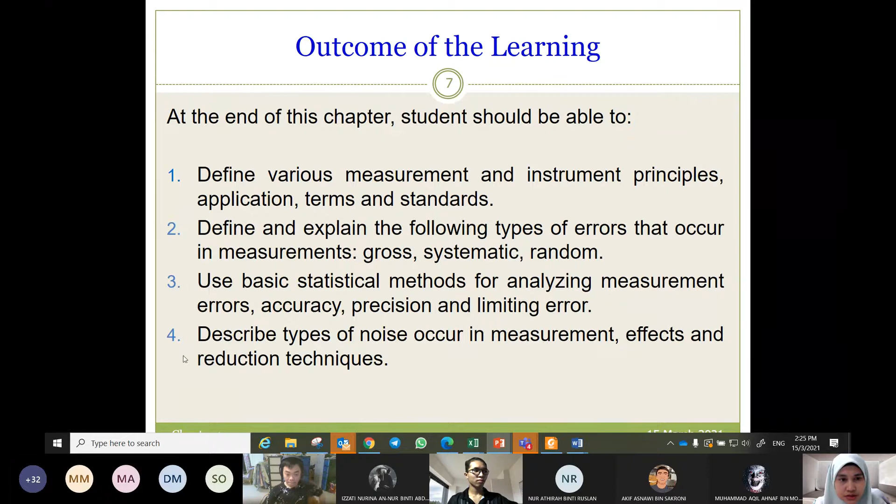explain the following types of errors: gross, systematic and random. Use basic statistical methods for analyzing measurement errors, accuracy, precision, and limiting error. Number 1 and number 2 will be covered today. Number 3 and number 4 will be covered maybe this Friday.

Okay, so basically this subject contains about 50% theory and 50% calculation. It is different from our subject during last semester, principle of electric and electronic, because most of the content of principle of electric and electronic is calculation, right?

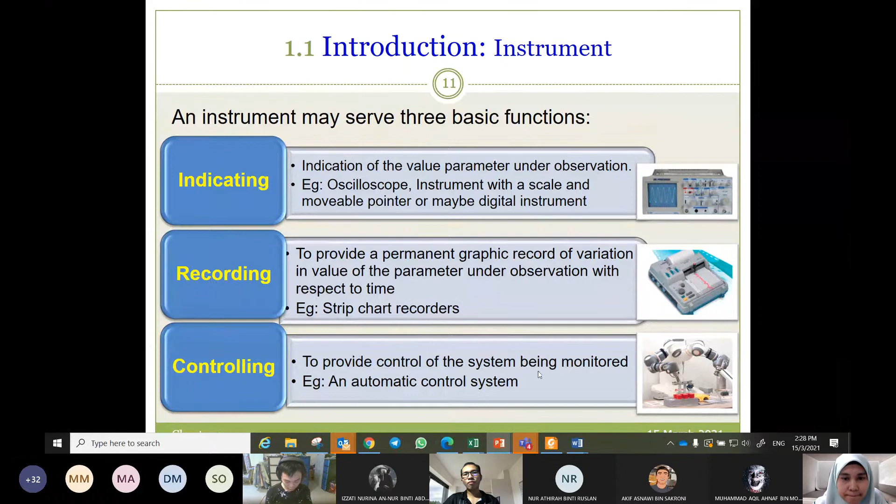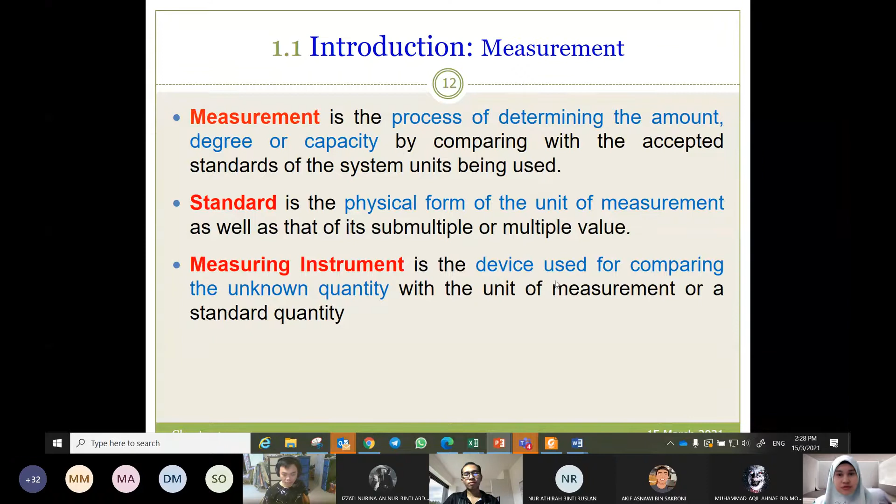Measurement is a process of determining the amount, degree and so on. Standard is the physical form of the unit of measurement. Measuring instrument is the device used for comparing - you can read by yourself. All of this is an introduction to instrumentation and measurement.

the unknown quantity is determined by measuring other functionally related quantities and calculating the desired quantity rather than measuring it directly with an instrument. So it requires a formula. For example, we want to find resistance - a resistance of a conductor may be determined by measuring voltage across the conductor V and current flowing through the conductor I, and calculating by Ohm's law, meaning that we want to find R.

So let's say we want to find resistance across a conductor or a resistor. We measure the voltage through the conductor, and then we measure the current through that conductor - the current flows through the conductor. Then by using Ohm's law, we calculate the resistance. So this is indirect, meaning that we are not directly measuring R, but we find V and I, and then we calculate R by using Ohm's law.

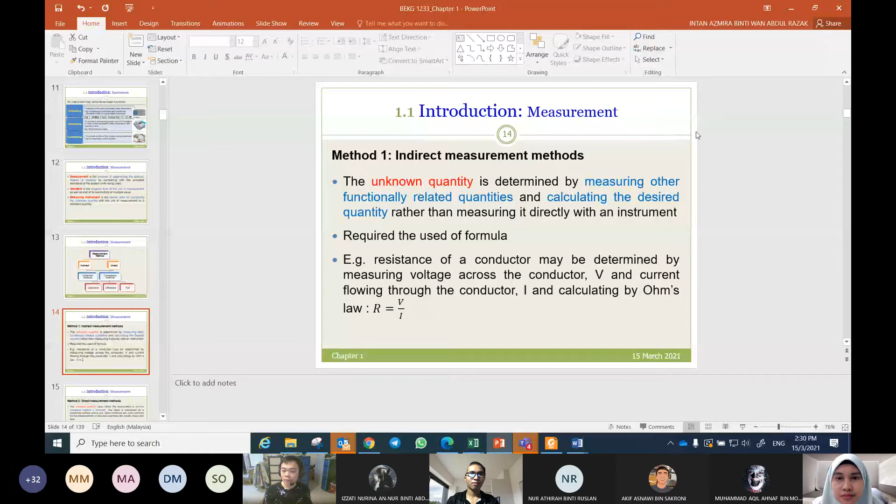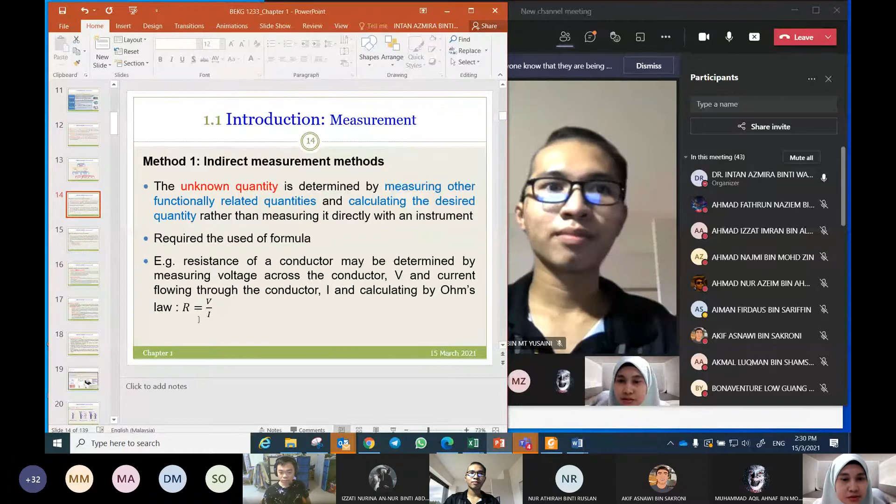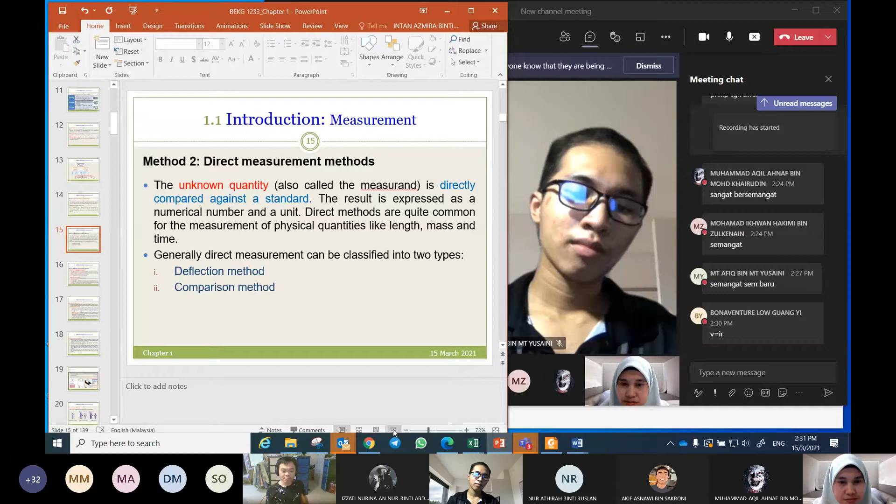So please give me the formula of Ohm's law, the original formula of Ohm's law. V equal to IR. Okay, so R equal to V over I, derived from Ohm's law.

Okay, the next is direct measurement method. The unknown quantity is directly compared against a standard. The result is expressed as a numerical number and a unit.

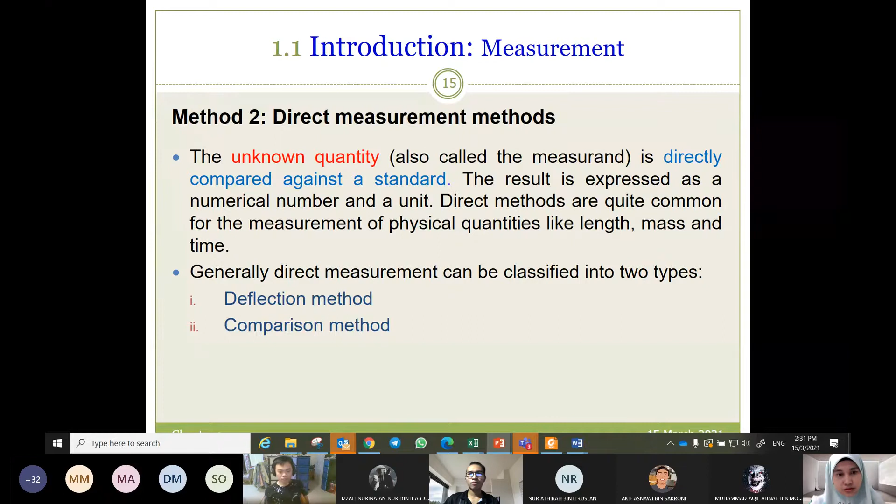So direct measurement can be classified into two: deflection and comparison. Deflection is when the unknown quantity is determined by means of a measuring instrument having a scale. So the instrument has a needle, for example, or has a digital scale, so it will show deflection for analog. Let's say we have an ammeter - when we measure current through a conductor, the ammeter will show deflection, and then we just read the measurement.

Comparison method: the unknown quantity is determined by direct comparison with the standard of the given quantity. It is applicable to quantities that can be reproduced by standards.

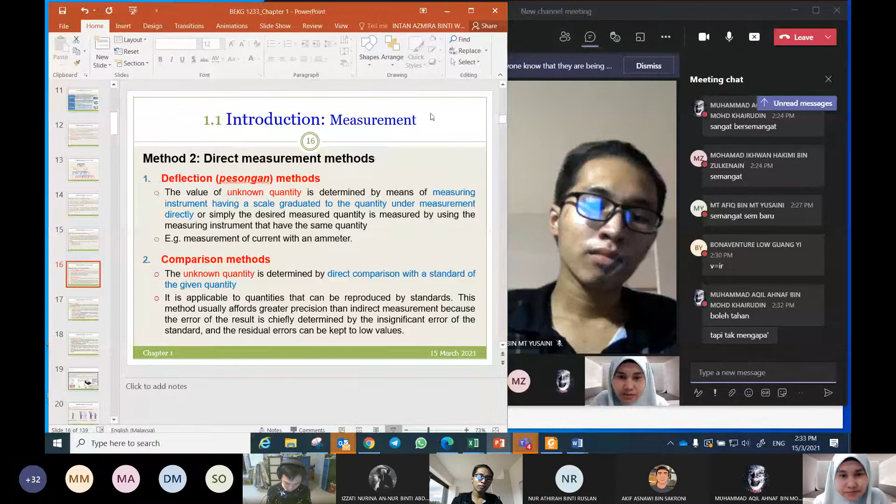Don't worry ya. Okay, anak I risau, anak dekat depan ni. Dia form 2, so belum masuk sekolah lagi. Kena bawa sini.

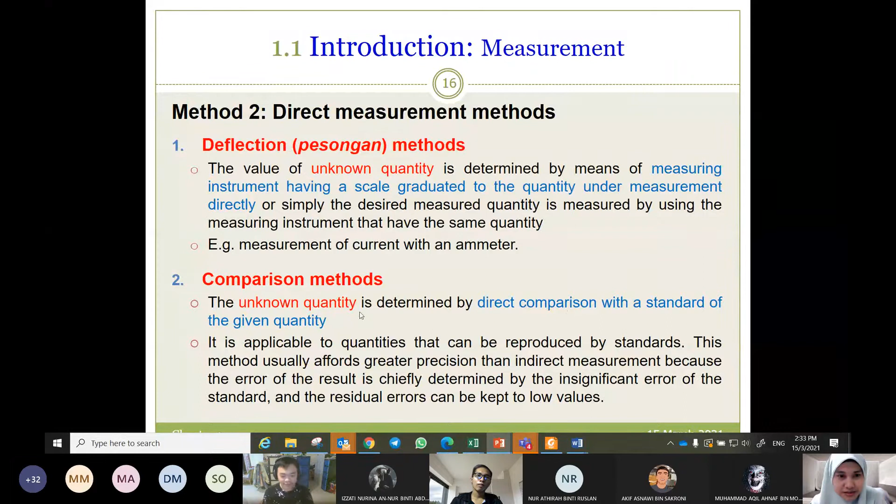Okay, comparison. We have three types of comparison method: opposition, difference, and null method. For opposition method, two quantities - the measured quantity and the quantity reproduced by the standard - act simultaneously on a comparison device. Difference method is between quantities that act on a comparison device. For null method, the resultant effect of the comparison is zero, associated with zero value. That's how we call it null.

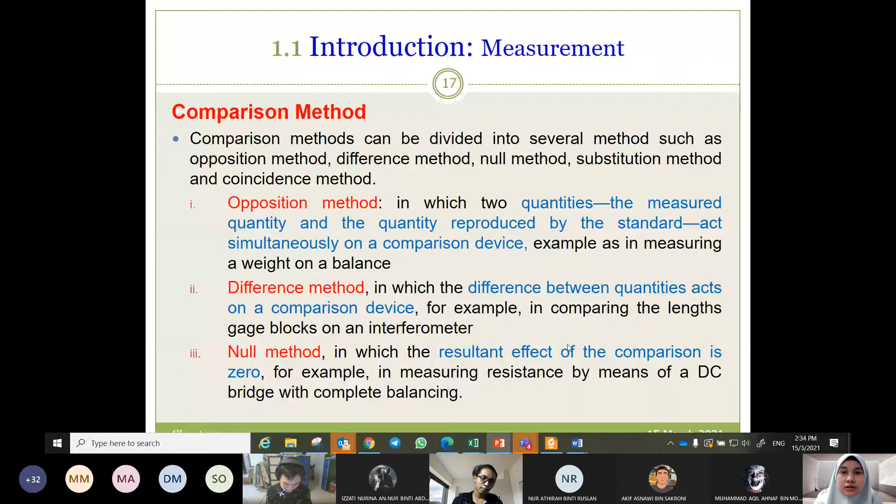For example, in measuring resistance by means of a DC bridge with complete balancing. You will understand better the null method when we learn chapter 5, I think chapter 5, it is DC bridge, because we will go through in detail the null method.

Null measurement is measuring current and voltage more accurately by balancing the circuit. So in null method, we balance the circuit and find the current. We make sure that current is zero so that no current flows through the measurement device. Today you will get the idea, maybe you can understand well, but we will go through it in chapter 5. Inshallah, in chapter 5 you will understand better. So in null measurement method, no current flows, then the circuit is balanced, so we make sure there is no current flow so that the device or circuit will be balanced.

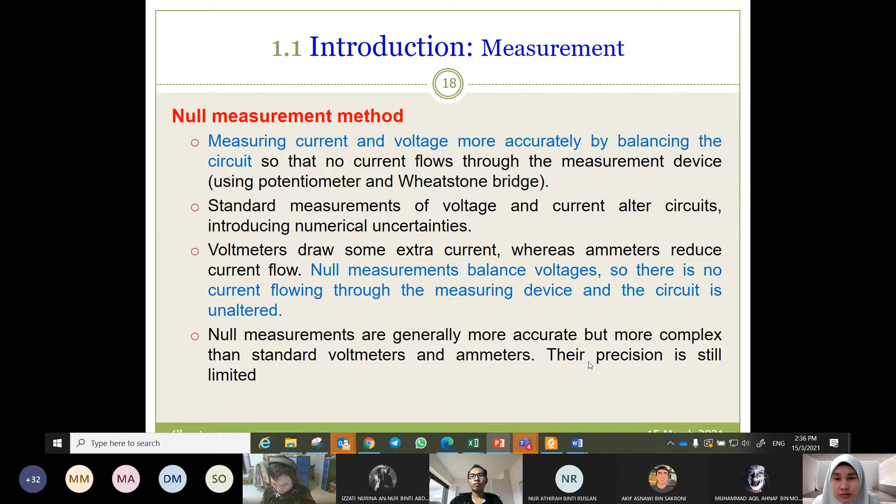Standard measurement of voltage and current alter circuits, introducing numerical uncertainties. Voltmeters draw some extra current, whereas ammeters reduce current flow. Null measurement balances voltages so there is no current flowing through the measuring device and the circuit is unaltered. Null measurements are generally more accurate but more complex. We will go through it in chapter 5. Their precision is still limited. Okay, this is null method.

Suppose you wish to measure the EMF of a battery. So this is a battery, the voltage of the battery is EMF. EMF is for the battery. Consider what happens if you connect the battery directly to a standard voltmeter. So this is the standard voltmeter, with a pointer. The positive terminal of the voltmeter is connected to the positive terminal of the battery, and the negative terminal of the voltmeter is connected to the negative terminal of the battery. Consider what happens.

Okay, if we connect a voltmeter directly to a battery, the actual quantity measured is the terminal voltage V, which is related to the EMF of the battery by V equals EMF minus IR. Okay, if we apply - what principle do we apply in the loop? If you look at this equation, what is this referred to?

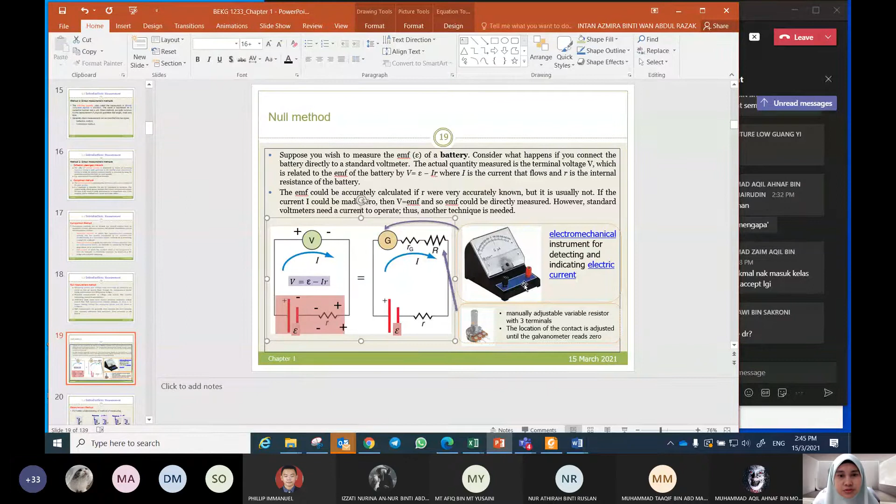That's why I show this circuit, because in the null method, null is 0, so this is the approach to make the value 0. In this example we use a galvanometer. The principle of the galvanometer is to read 0, that's why the middle scale of this galvanometer is 0.

If the needle deflects to the right or to the left, that means there is current, there is a value of current in the circuit. So how to make the current equal to 0? We adjust the variable resistor - R equals V over I, so if R is high, the current is low. So we will adjust R until it deflects to 0, meaning there is no current in the circuit.

So this is a picture or summary of the measurement method. This is for deflection, we just read - this is the measurement. A is the measurement, so the measurement value of A is here.

The highlighted pink is the measurement, so it is A here minus R. This is the difference method.

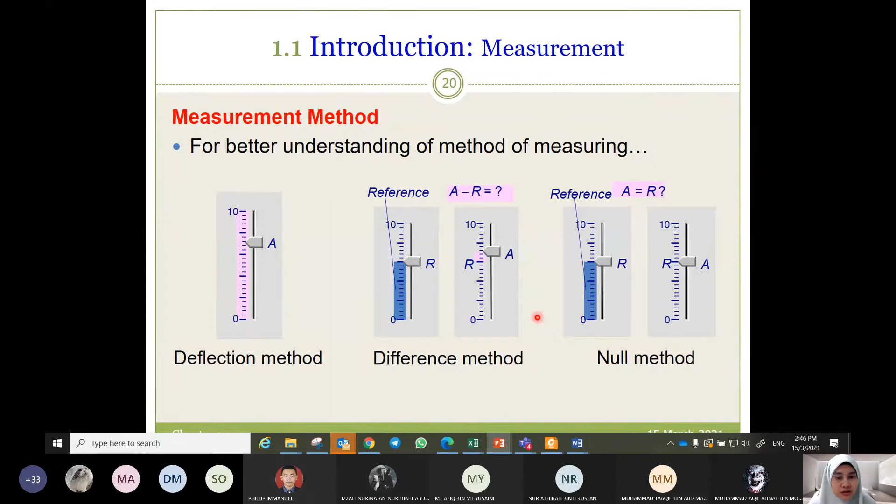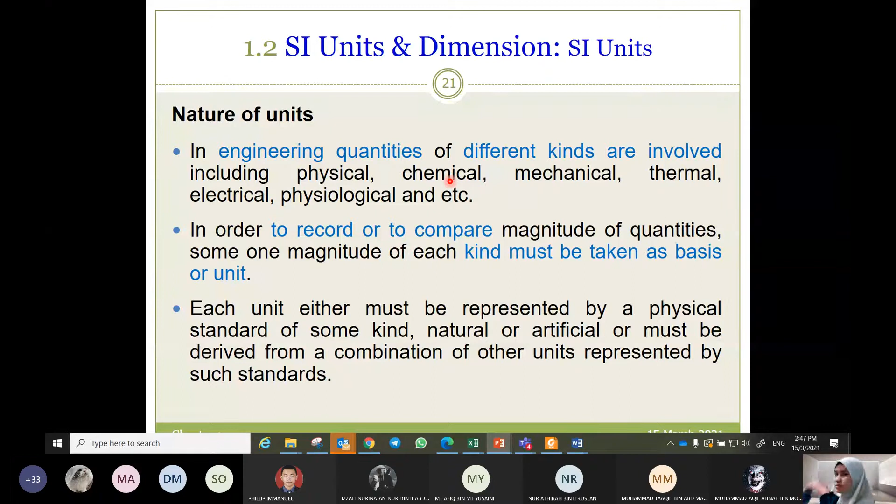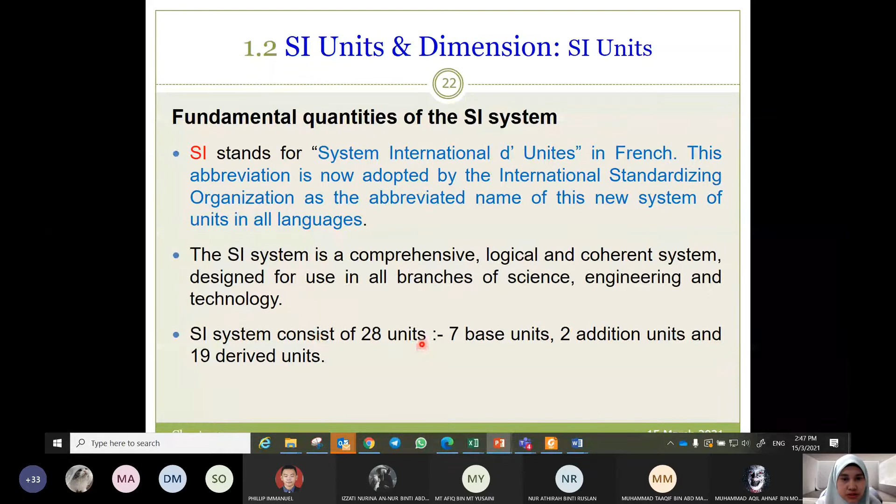The SI unit has been covered during your secondary school, matric, or diploma, right? SI, International System - consists of 28 units, 7 base units, 2 additional units, and 19 derived units.

Base unit - this is base unit: length, mass, time, temperature, luminous intensity, electric current, and so on.

Make sure during your final exam, test, quiz, and assignment, please do not leave out the unit of each quantity. Let's say it is length, so make sure you put meter or kilometer and so on. If it is current, make sure the final answer you must write the unit, like A for ampere.

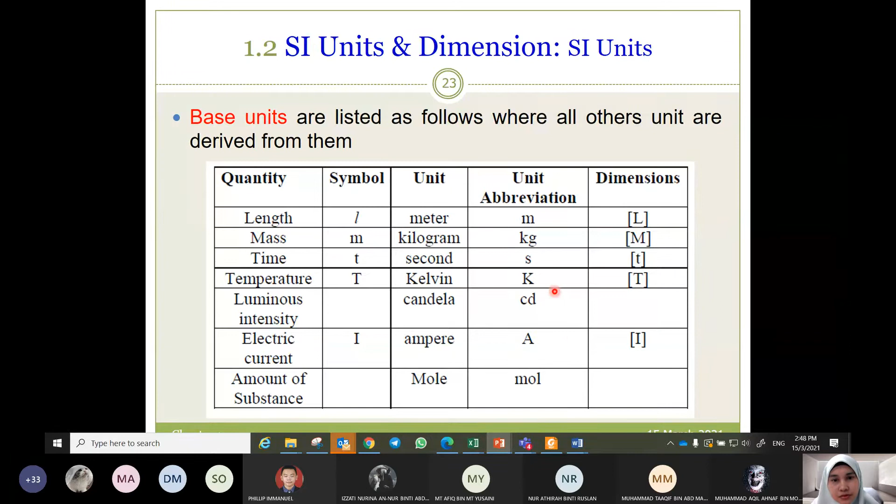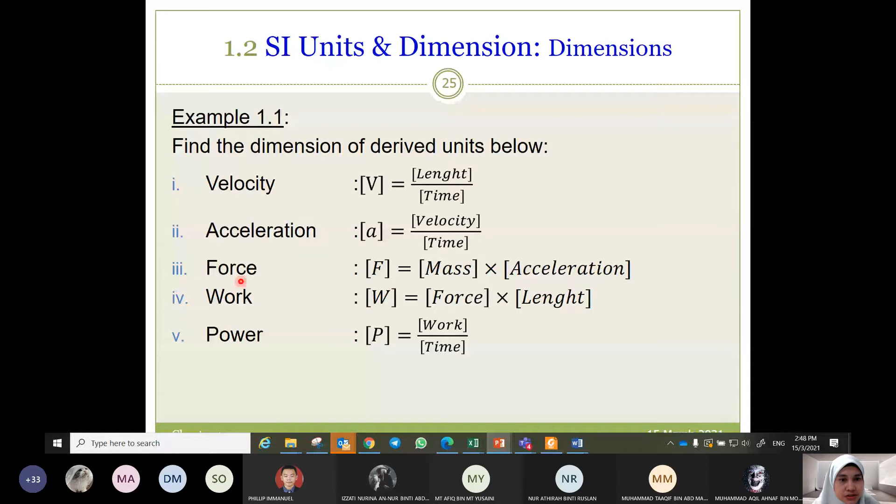Dimension - you can read by yourself, dimension of velocity, acceleration, and so on. I think this subtopic has been covered during your secondary school. Velocity, you know all the formula, so I think no need to explain.

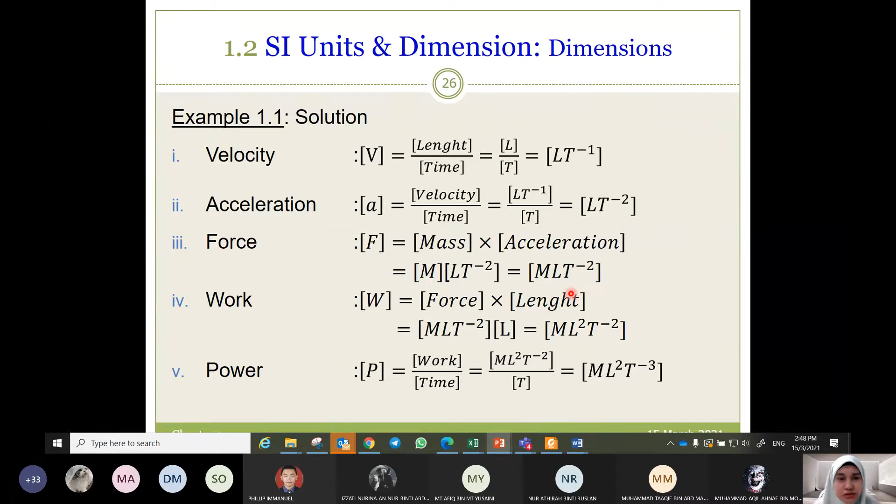Standard of measurement - as measurement is a process of comparison, therefore regardless of any measure method, a basis of comparison must be employed. Standard of measurement is defined as the physical representation of a unit.

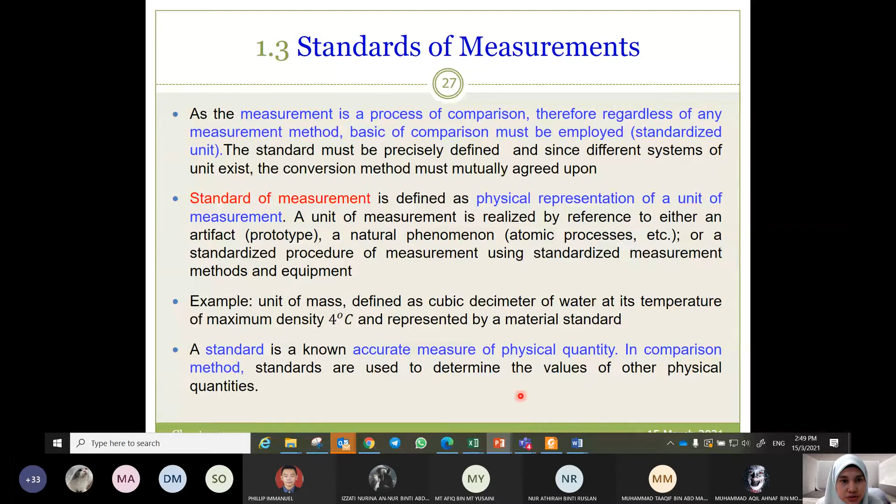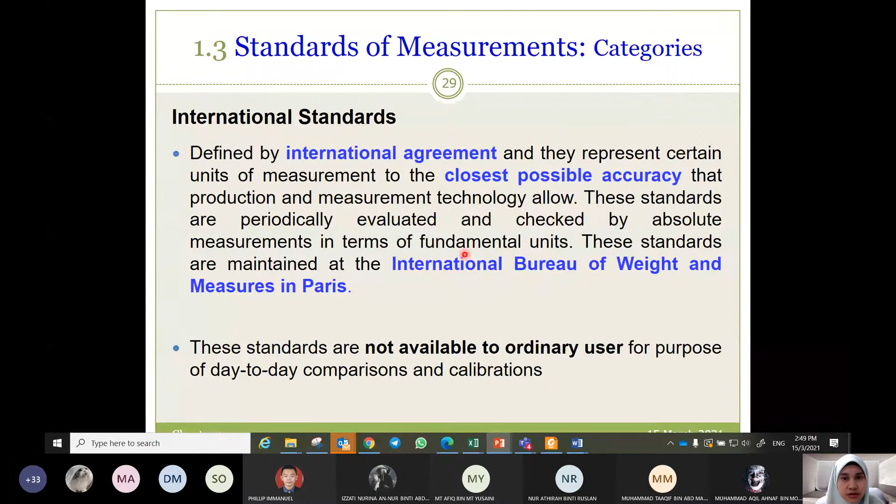There are 4 categories of standard: international, primary standard, secondary standard, working standard. This is the explanation and summary. International standard is by international agreement, and they represent certain units of measurement to the closest possible accuracy.

The Bureau of Weight and Measures in Paris is the owner of the international standard. It is applied at the level of work worldwide, not available to ordinary users.

For primary standard, it is calibrated independently by absolute measurement at each nation, for verification and calibration of secondary standard, for example SIRIM. It is a national institution, not available to an ordinary user.

Secondary standard is used by measurement and calibration laboratories in the industry, so this is for industry.

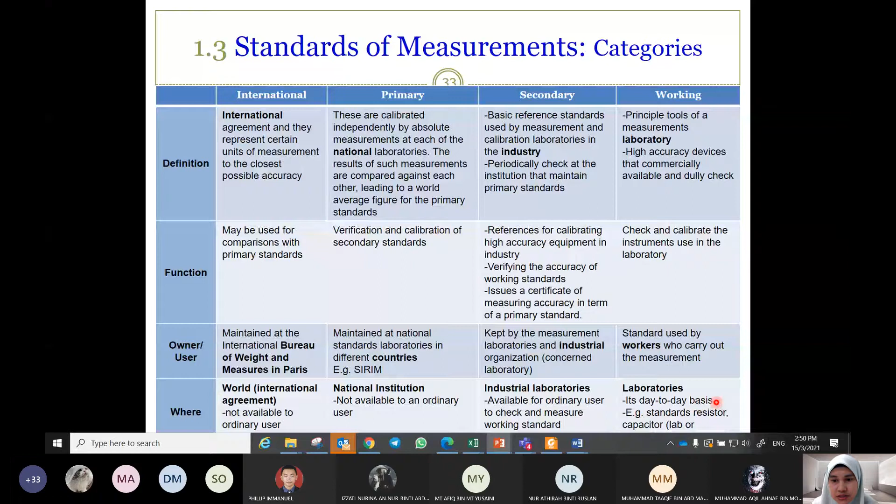Working standard is used in the lab on a day-to-day basis, for example standard resistor, capacitor, and so on.

Any question up to here? Very basic. No, doctor. Okay, very basic, right?

Bonaventure, how to pronounce your name? Bonaventure Lo Guangyi, Bona. Local student or international student? Local, okay, so your hometown is where? Negeri Sembilan. Can you speak Negeri Sembilan slang? No.

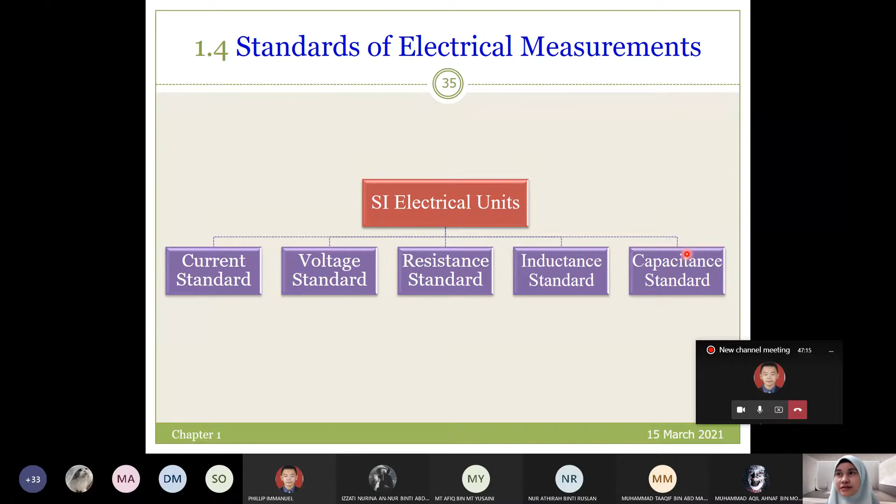Current is the quantity of electricity charge that passes a given point in a conductor during a time of 1 second, or the time rate of change of charge. So current is equal to Q over T. Q is charge. Unit of current is ampere.

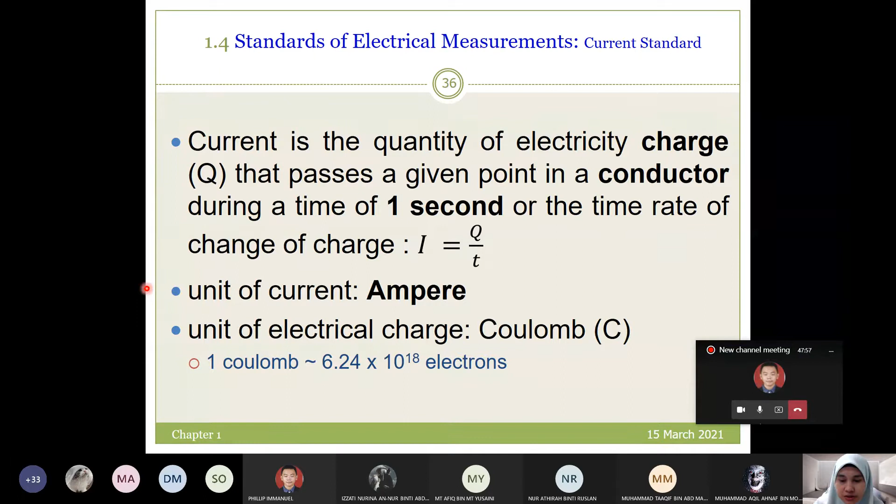Unit of charge is coulomb. 1 coulomb is equal to this number. No need to memorize this number as we are facing online learning. You can refer to your notes.

This is for voltage. Voltage is the potential difference between 2 points of a conductor. Imagine that this is a conductor carrying a current of 1 amp when the power dissipated between this point is 1 watt.

Voltage is the unit of electromotive force and potential difference. So EMF is for battery, or for voltage source. Potential difference is for other elements. Both parameters, EMF and potential difference, use voltage as its unit.

One joule of work is considered done when 6.24 multiply 10 to the power of 18 electrons are moved through a potential difference of 1 volt. 1 electron carries a charge of this number. When only 1 electron moves through 1 volt, the energy is known as electron volts. EV is used in the case of very small energy level associated with electrons in orbit around the nucleus of an atom.

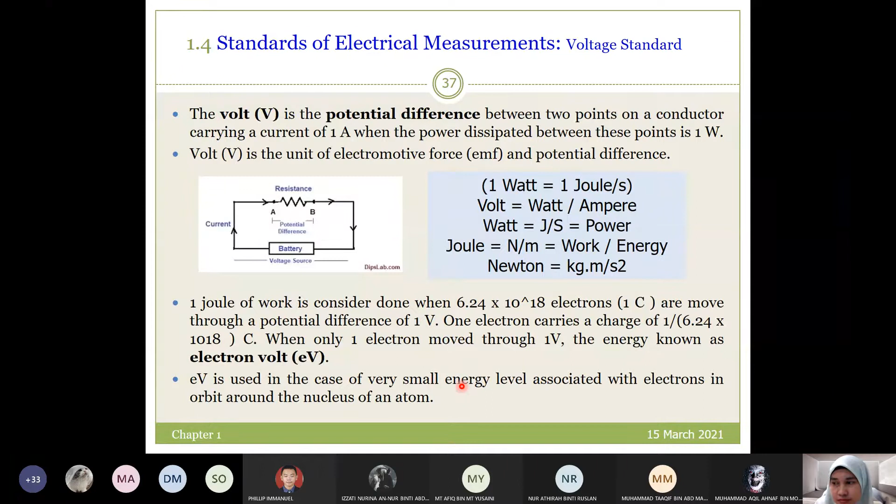So this one was covered last semester, in the subject Principle of Electric and Electronic. Which chapter? Diode. Semiconductor, right?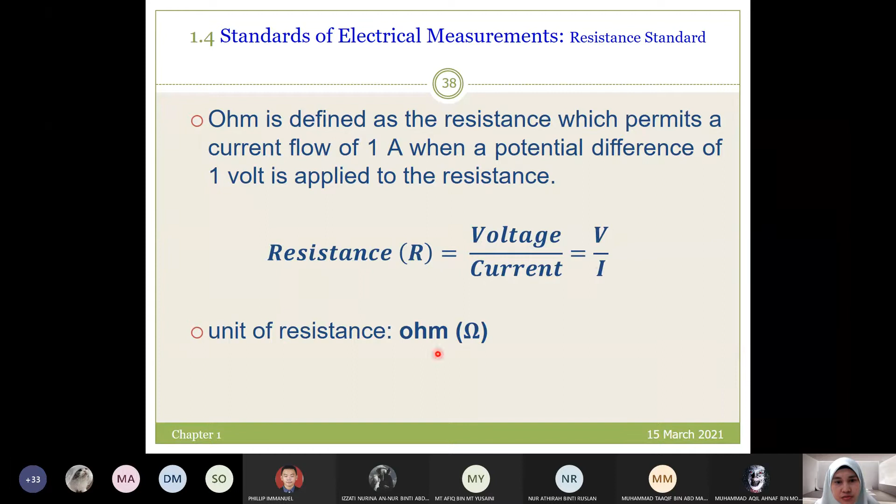Now resistance standard. Ohm is defined as the resistance which permits a current flow of 1 amp when a potential difference of 1 volt is applied to the resistance. So R is equal to V over I. This is Ohm's law, V equal to IR. Unit of resistance is ohm.

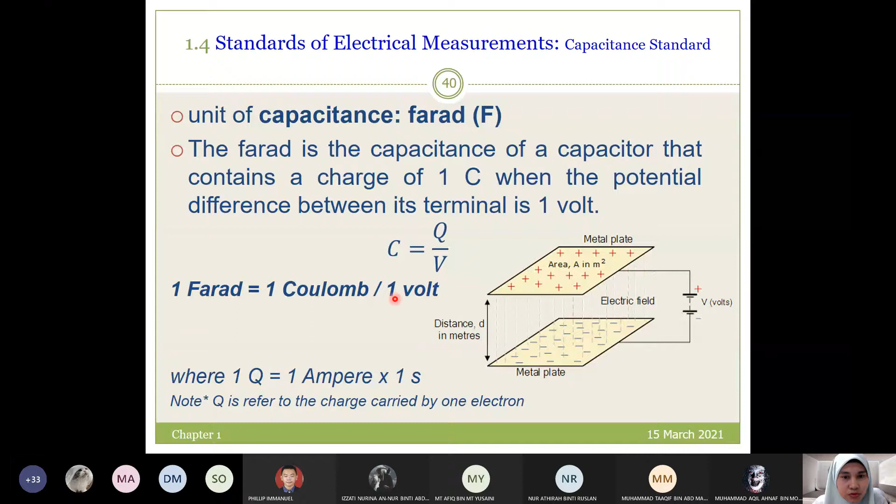So this is a capacitor. A capacitor has 2 plates, plate 1 and plate 2. When the potential difference between it is 1 volt, the charge is 1 coulomb. C is equal to Q over V. 1 farad is equal to 1 coulomb over 1 volt.

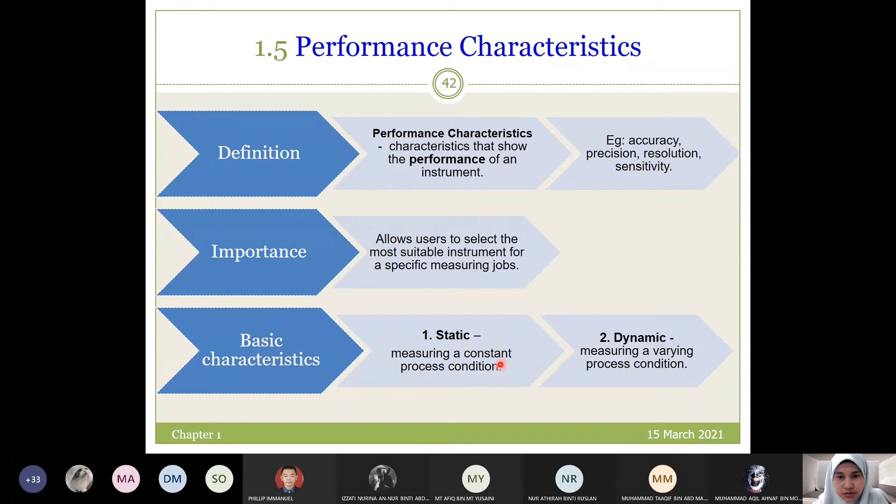Basic characteristic two: static and dynamic. Static measures constant process condition, dynamic measures varying process condition.

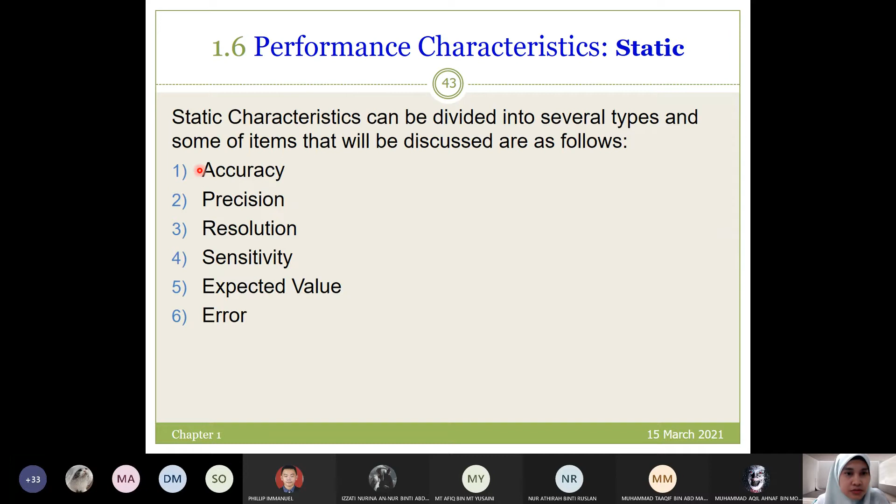All these terms, I'm sure that you are familiar with: accuracy, precision, resolution, but we will go through a bit of detail in this chapter.

This is accuracy, the degree of exactness or closeness of measurement compared to the expected or desired value. Meaning that measurement versus actual, expected, true, or actual value. Closeness of the instrument output to the true value of the measuring quantity.

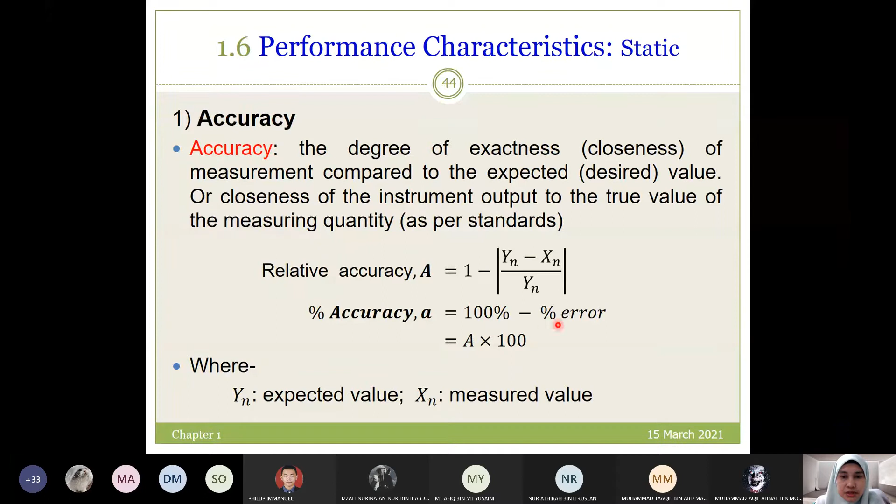So relative accuracy is equal to 1 minus this, where yn is expected value, this is measurement value divided with expected, or divided with actual or true value. The percent is times 100. Percent of accuracy is 100 minus percentage of error.

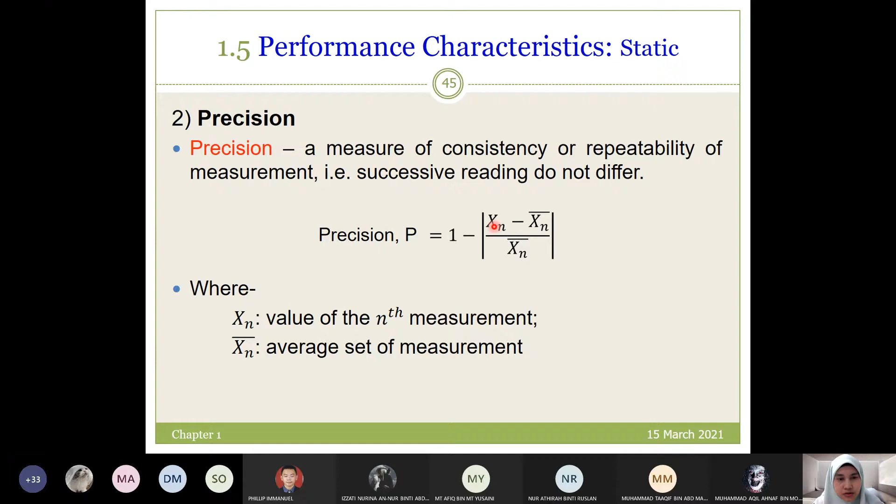This is precision, a measure of consistency or repeatability of measurement. The formula is 1 minus this, where this is the value of nth measurement minus the average, divided with the average.

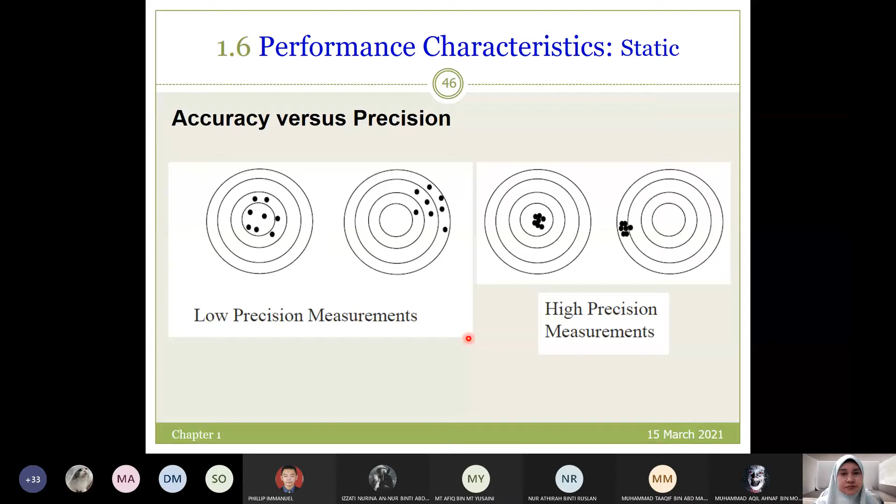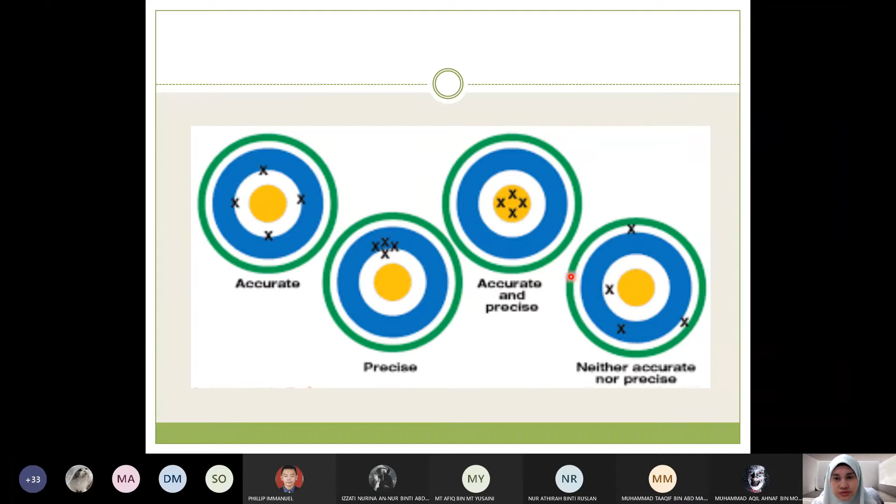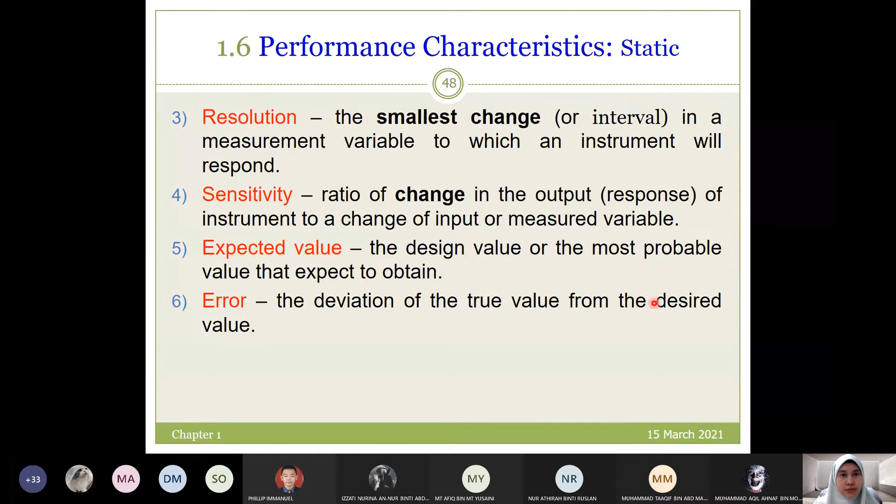battery or voltage source should be 1.5 volts. But you want to measure, you want to confirm the value of the battery. So you would choose 2 volts - 2000 millivolt is equal to 2 volt - because it is closer to 1.5 volt. It may read back something around 1.567. If you choose 20 volt instead, you will get 1.57, for example. It is still correct, but you don't have the precision. If you choose 200, you will get 1.6 maybe. So choose the smaller value that is greater than your target.

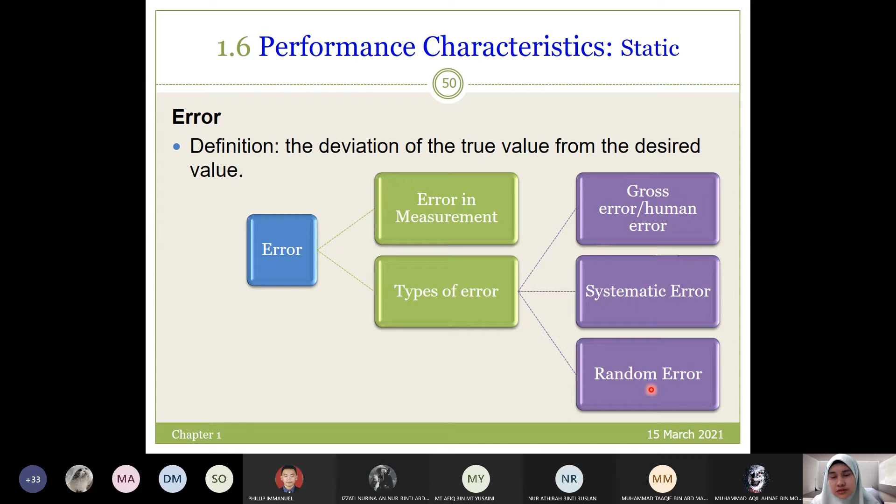We know that generally no electronic component or instrument is perfectly accurate. It will have some error or inaccuracy, so it's very difficult to define the true value. There is always some difference between the measured and the true value. So absolute error is the difference between the expected and the measured value, meaning the difference between the actual, expected, or true value and the measurement.

Error may be expressed either as absolute or percentage. Percentage is just divided by the actual or expected value, multiplied by 100. Relative accuracy is 1 minus the error. Percentage of accuracy is 100% minus the percentage of error. Precision is given by this formula.

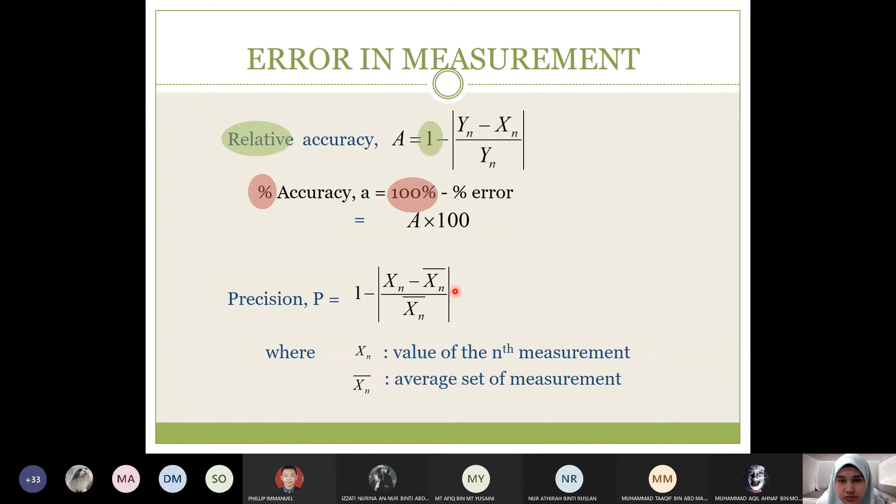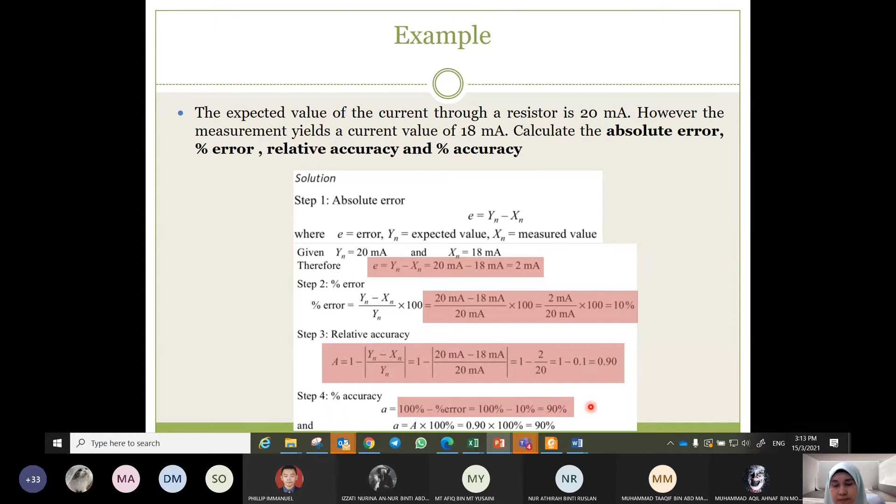Type of error: we have gross, systematic, and random error. Gross error is also called human error, because it's caused by human mistakes in reading or using the instrument. It may also occur due to incorrect adjustment of the instrument, so you can read by yourself. It's very easy to understand, cannot be treated mathematically, cannot be eliminated, but can be minimized.

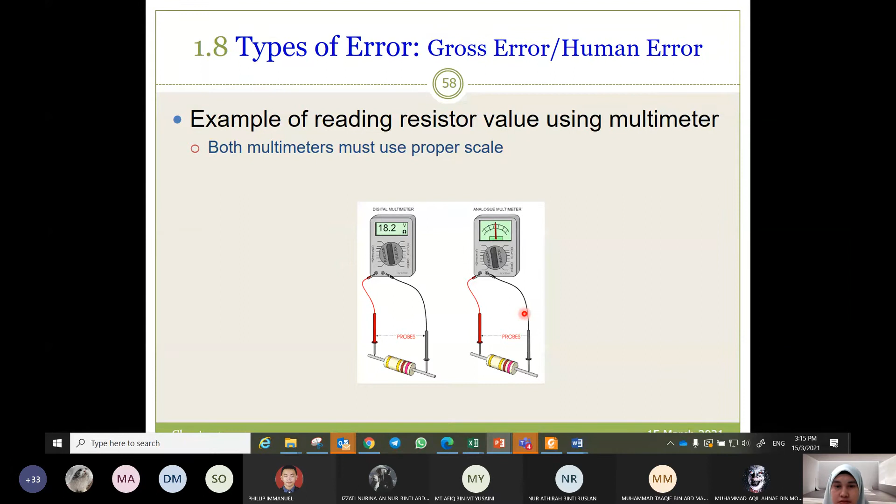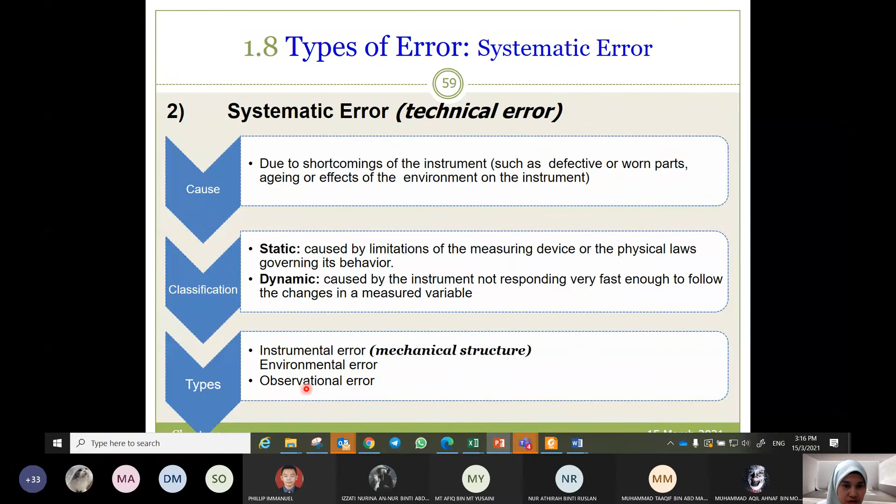Okay, systematic error or technical error. Systematic is technical error due to shortcomings of the instrument. So gross error is caused by human, systematic error is caused by technical issues. It is due to shortcomings of the instrument, such as defective or worn parts, aging, or effects of the environment on the instrument. There are three types: instrumental error, environmental, and observational error. You can read by yourself.

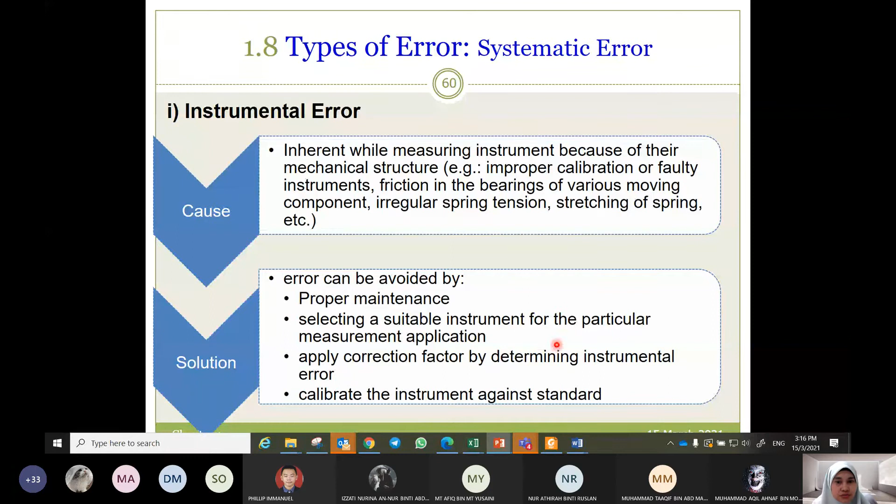It is caused by inherent issues while measuring instruments because of their mechanical structure, for example improper calibration or faulty instruments, friction of the bearing, irregular spring tension, and so on. How to avoid it: proper maintenance, select a suitable instrument for the particular measurement application, apply correction, and so on.

Environmental error is due to external conditions, how to solve it, for example use aircon.

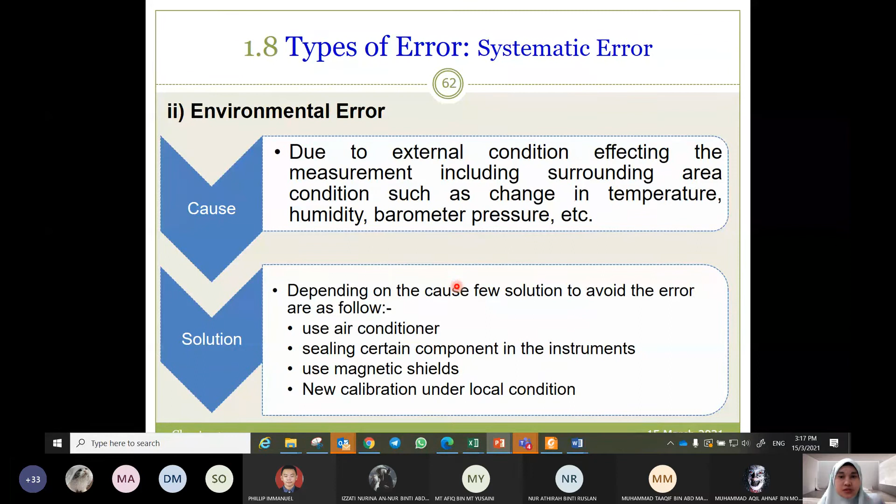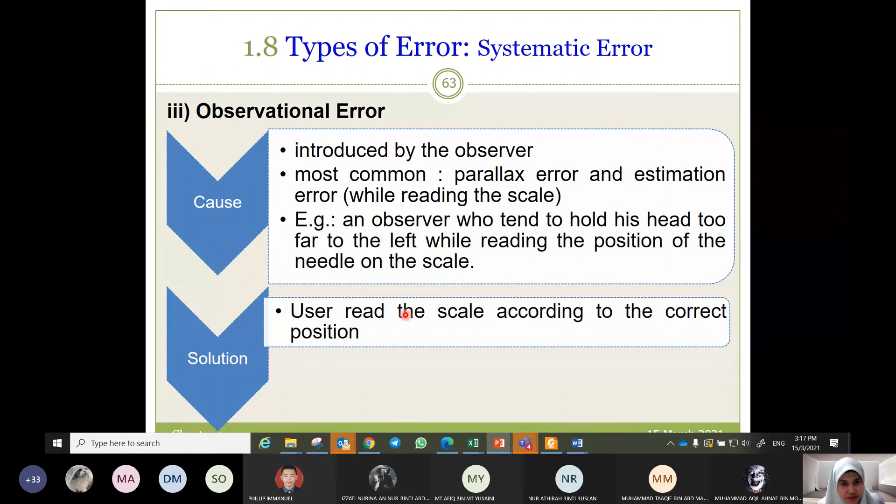Observational error is introduced by the observer, for example parallax error. You know what parallax error is, right? You have learned it during your primary school, not secondary school.

This is parallax error. Okay, random error, it's due to unknown causes, that's why we call it random error. It occurs when all systematic error has been accounted for, or it is an accumulation of small effects. How to avoid it: increase the number of readings, use statistical methods to obtain the best approximation of the true value.

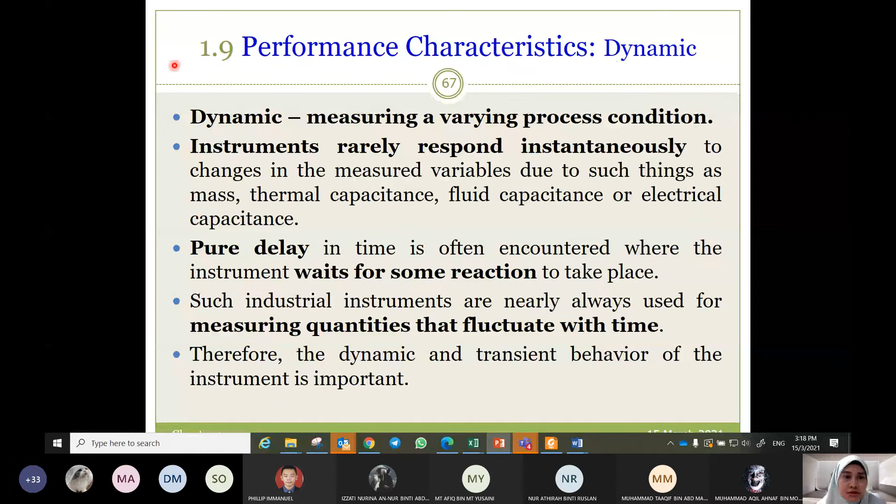Okay, this is the summary of error in measurement. Previously we learned about static performance characteristics, right? So this is dynamic, you can read by yourself.

Measuring a varying process condition. Okay, you can read by yourself.

The dynamic behavior of an instrument is determined by subjecting or forcing its primary element to some unknown and predetermined variation in the measured quantity. The three most common variations in the measured quantity are: step change, linear, and sinusoidal change.

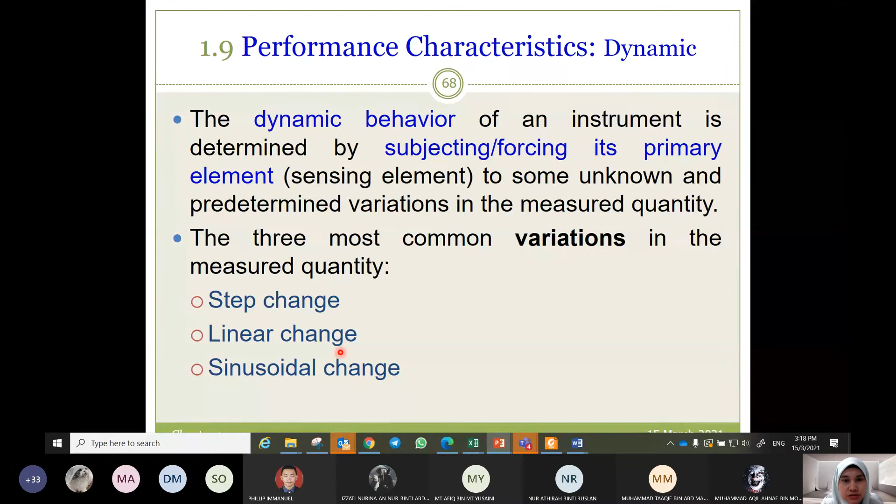For example, in step change, the primary element is subjected or forced to an instantaneous or finite change in the measured variable.

The dynamic performance characteristics of an instrument: speed, dynamic error, lag, fidelity. Speed of response is the rapidity with which an instrument responds to changes in the measured quantity.

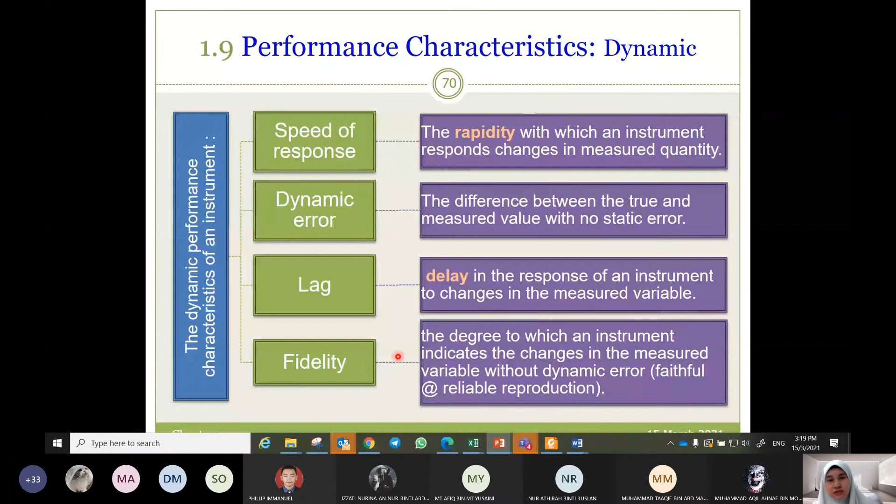Dynamic error is the difference between the true and measured value with no static error. So our instrument should have this characteristic, for example no delay in the response of an instrument. And fidelity is faithful or reliable reproduction.

Okay, this is statistical analysis. I think some part in statistical analysis has been covered previously. Okay, for example, arithmetic mean.

I'm sure you know what arithmetic mean is. It is the average, the summation of all readings divided by the number of readings. The deviation is the difference between each piece of test data and the arithmetic mean.

Meaning that D1 equals that reading, X1, minus the average. This is deviation, meaning the difference between each reading and the average of the readings. Average deviation is the summation of all deviations divided by the number of samples.

This expresses the precision of the measuring instrument. A low value of average deviation indicates a precise instrument. So a good or precise instrument has low average deviation. The same goes for standard deviation.

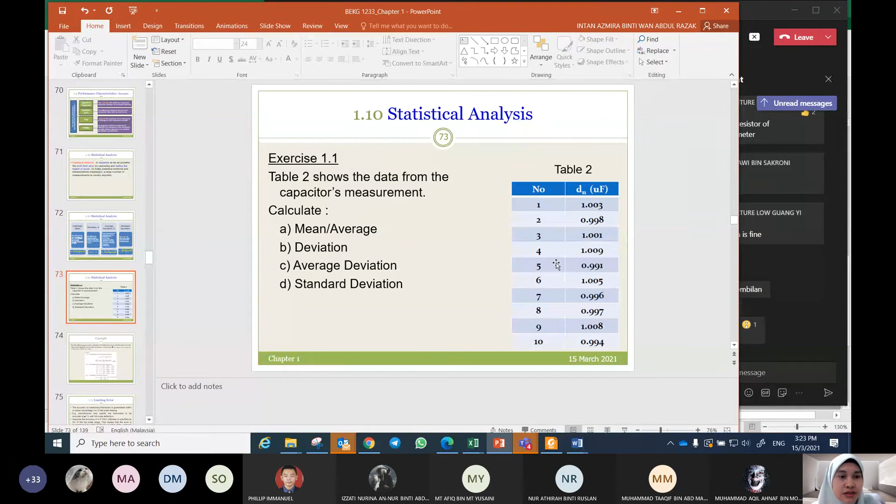Okay, this is another example. Number 1, calculate arithmetic mean. It is average, so just sum all the readings divided by 5, because we have 5 readings here. This is the average or arithmetic mean.

Number 2 is deviation of each value. So you just get the difference between each measurement and the average. 49.7 minus the average, 50.1 minus the average, or the reading minus the average, and you will get the deviation.

So you can just take the absolute or put a modulus sign. You can ignore the negative sign, you can make it positive or negative. And then what else? The algebraic sum of deviation.

You just... okay, so usually we are not asking about algebraic sum of deviation. Usually we ask about standard deviation.

In standard deviation or average deviation, we take the absolute, we ignore the negative sign. Same goes for standard deviation where we square each D. You will get positive, right? If it is negative, you will get positive.

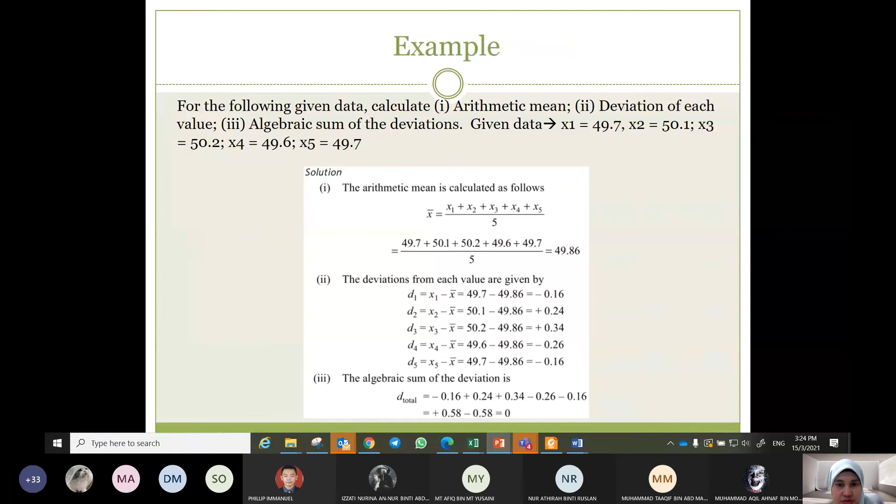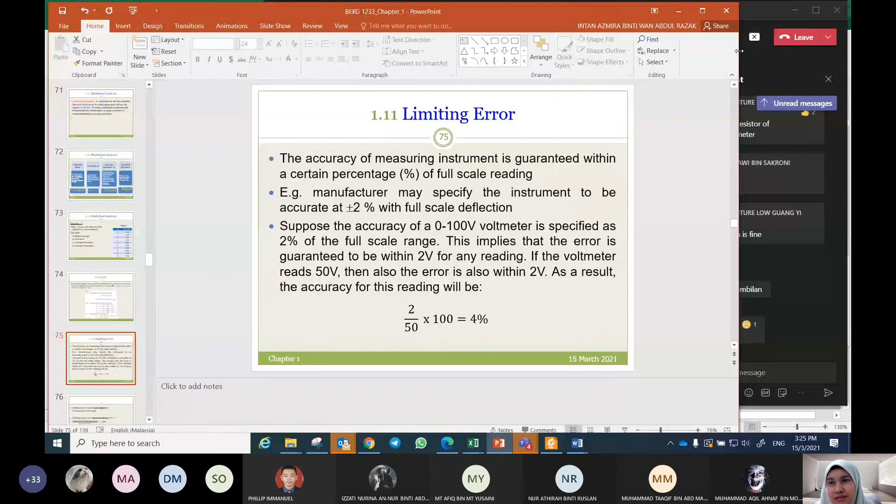Okay, this is the challenging part in this chapter, we will learn it this Friday. If I teach you today, I think it will be full, too much, am I right? Because you need to pay high attention, you should pay your best attention to the limiting error subtopic. Let's learn it this Friday.

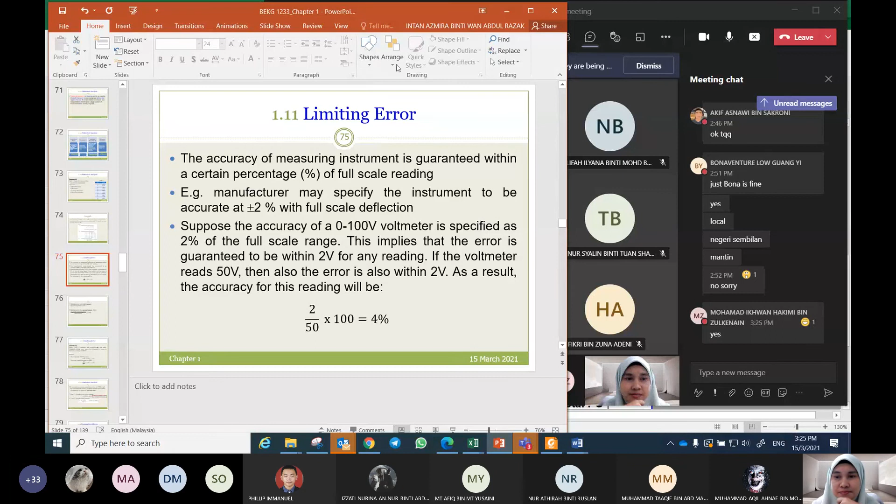Any question? You can ask anything from the first slide until this slide. Any question before we end our session?

Even though you think it is a stupid question, just ask, because during your quiz, midterm test, final exam, you cannot ask me anymore. If you want to ask, ask now.